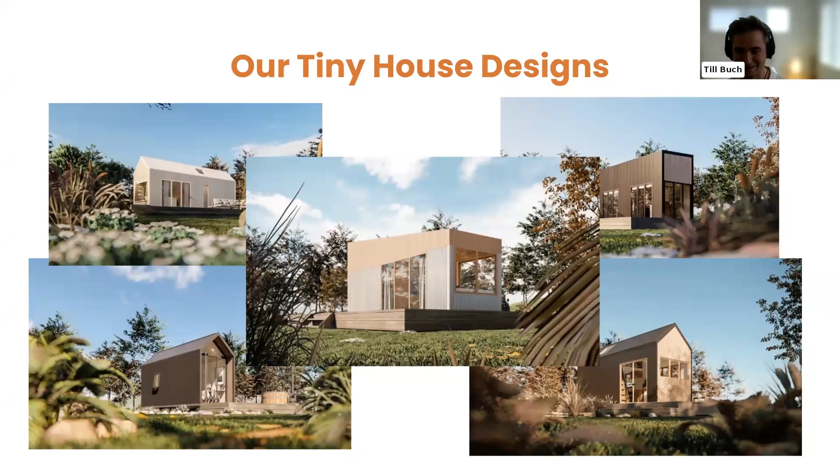A little bit more background about us: we've designed over 100 tiny homes now over the last few years, and these are some of the designs that we've done. You might have seen these around somewhere on the internet, and Pinterest probably as well.

So what will you learn today? To get into it, we've seen that designing your tiny house is simply one of the most important steps on your tiny house journey. If you think about it, you will be living in your tiny house for maybe a year or two, or if you've got a short-term solution in mind, maybe 5-10 years, or maybe you will be living in it for most of your life, if that is your plan.

And if you think about it, a tiny house is a small space and it needs to be perfect for you. We want to make sure that you can design your own tiny house so it is exactly right for your unique lifestyle.

What I will be showing you today is how to go from the inspiration stage - you can already see Pinterest on there, so you probably know what that is like - and take all of your inspiration and go from a concept that you can then refine further, or even share with a builder, DIY by creating plans that you can show to them, or then of course DIY as well.

I will be showing that using our own software. I will be live designing a tiny house in front of you, so you can just follow my own design process. It doesn't take long - that's why I can do it in the 30 minutes that we've got.

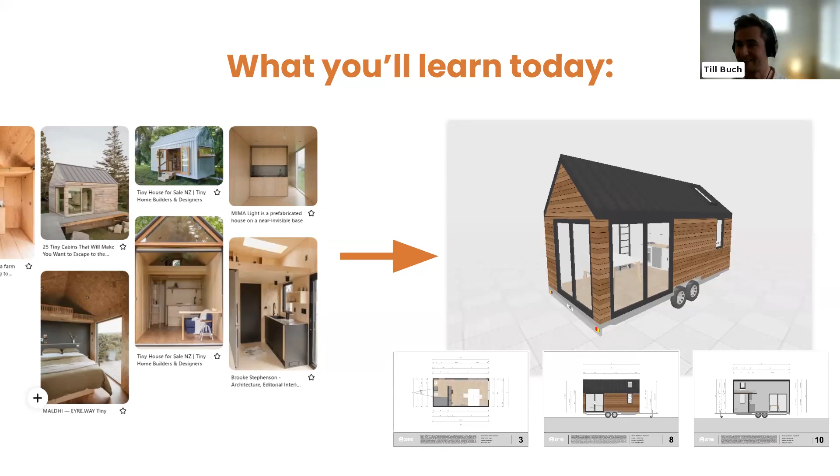And just as a reminder, this talk is for everyone. So if you are just at the start of your tiny house journey and you're just discovering what the tiny house movement is like, great - you're discovering a little bit about designing tiny homes and how that might work for you.

If you are already deep in your design process and you're trying to finalize things, then this is also great for you, because you can understand how you can go to the next stage and actually create plans that you can use to show your builder or build off.

Or if you are a tiny house builder listening in, this will also show you how you can efficiently design a tiny house rather than spending 50-60 hours in SketchUp or AutoCAD hacking away at plans. You can do that in a couple of minutes if you're using the software.

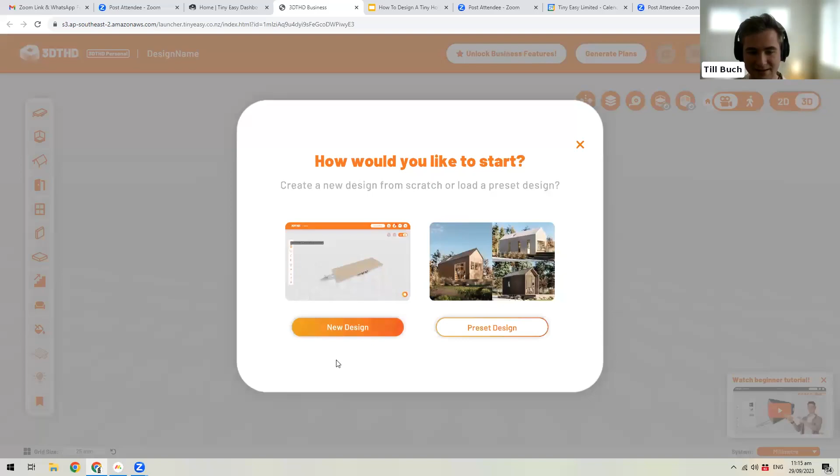All right, so I'm just going to stop this presentation here, and I'm going to jump into the software. So this is the 3D Tiny House Designer, and I'm going to start by creating a new design. So let's call this one here Tiny House Conference. There we go, conference, if I can spell, perfect. And I will use the imperial system to get started, because that's what most of you guys will be familiar with probably. Again, you can choose whatever works for you.

And I'm going to pick a 20-foot long trailer. I will make it 10 feet wide, and it will have a double level so you can fit a loft into it. And I will choose a 4-inch wall thickness. Just as a quick reminder, this is just the start. When you're configuring your tiny house, you can change all of this later. It's just a good starting point so you can put down a basic design. Now I'll choose a gable roof and a 35-degree angle, and there we go. Now we've got our basic tiny house.

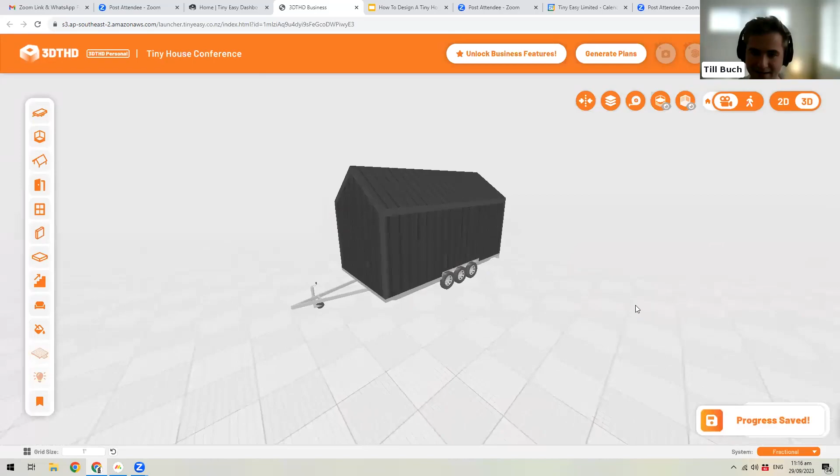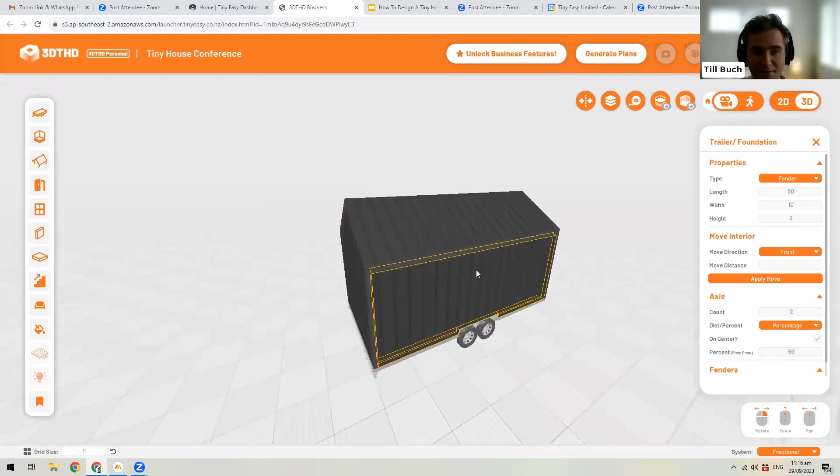So I'll just quickly click this tutorial reminder away because I already know how the software works. And I'm going to go in and change the axle of this down to a 2-axle trailer because it is a small tiny house. We don't need 3 axles for it. And I will maybe move the axle back a little bit so we have some more space and it's fully centered. So now what I will do, I will go in and create the design. So it looks like the zoom bar is just hiding what I've got planned here. So I'm just going to close some things down.

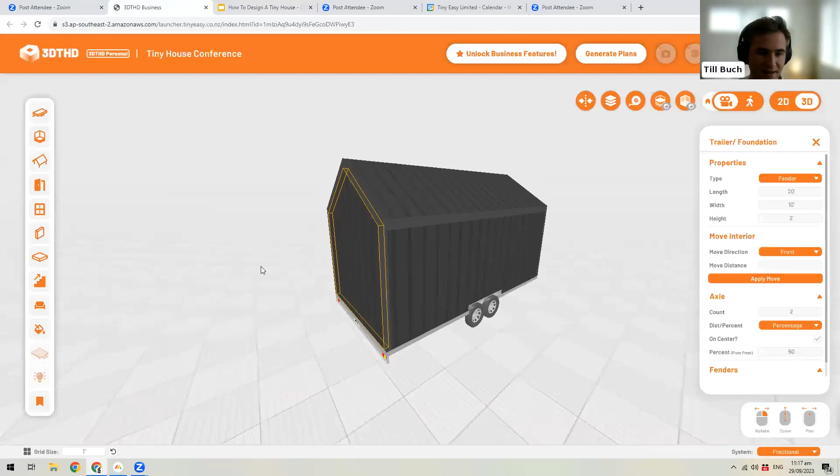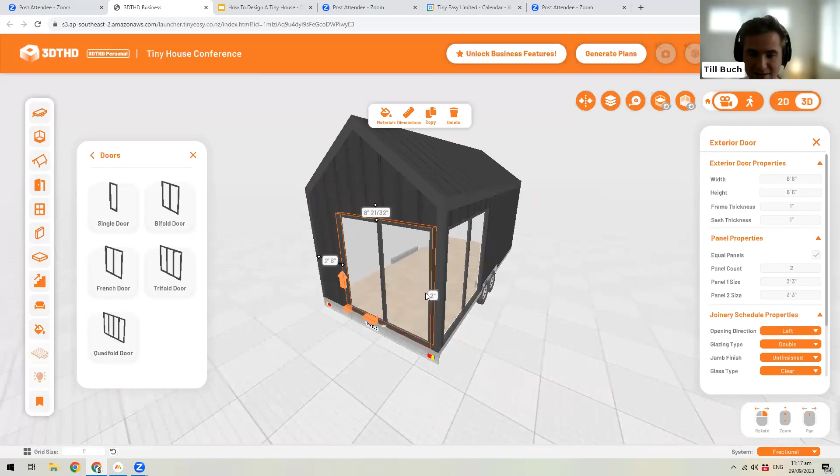There we go. So I will look into my presentation and I will look at my inspiration. So for the exterior, I want to have this kind of minimalistic modern exterior with 2 large windows, which will be for my working area. So I'm just going to go in and grab an exterior door, and I'll grab a bifold door, and I'll just pop the door onto the exterior, and I'll change the door to a 6'6" width, which will just give it a nice square look. And I will just move it 2 feet away from that edge here, and I'll grab this door again. I'll just copy it over, and I'll move it over a bit, and again have that 2-inch gap here over there. Perfect. So now we already have that exterior, and I can go in to start modifying my interior.

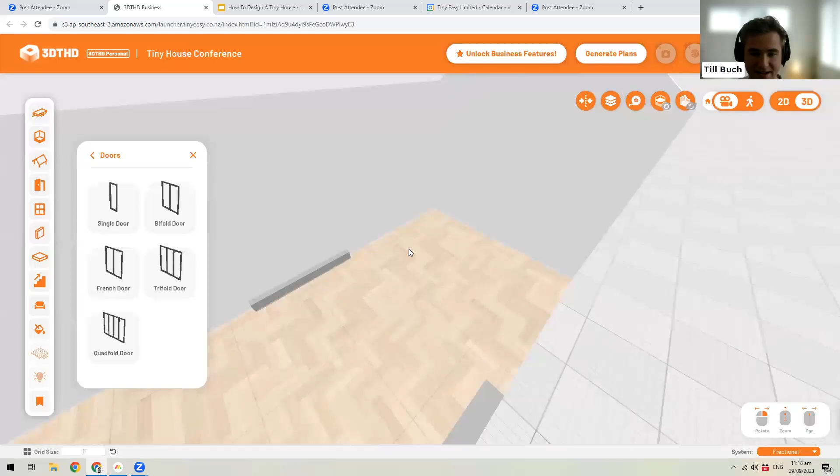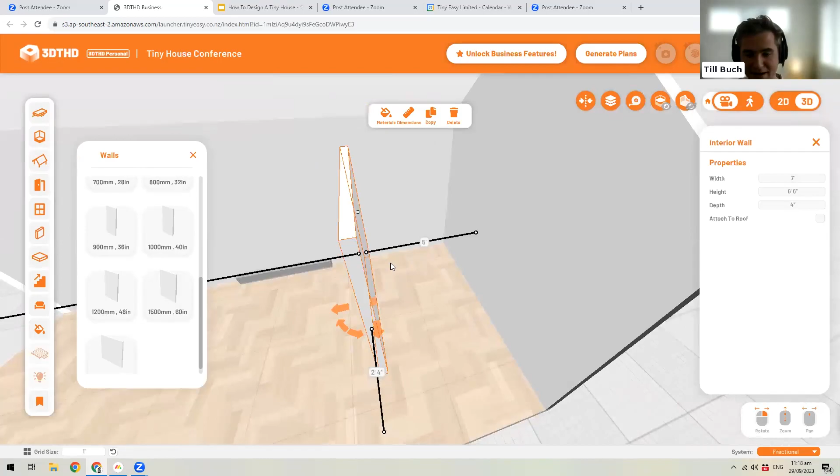So I'll just disable the exterior here for now so I can look inside, and I want to create a small little bathroom like this here. So it's a similar layout like this. So you've got a door and a bathroom behind and a loft on top. So I'm just going to recreate this. So I'll go into my walls and grab a wall like this. It's 60 inches big, but I'll just change it to, let's say, 7 feet for now, and I will have a 5-foot gap here. So we have a pretty purpose-built tiny house, and we don't need that much intricate design here, so we can actually have a bit of a bigger bathroom.

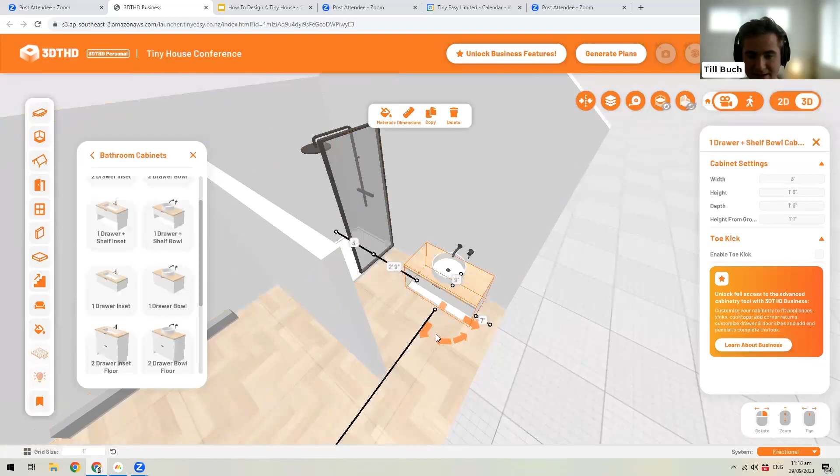So I'm going to go in now and grab a shower. So I'll grab this shower here, and I'll just rotate it and push it into the corner. So it's already 5 feet, so it fits perfectly. And now I will grab a vanity. So I'll just grab this preset here. So it's a floating vanity, and I'll change it over to a 3 feet width like that.

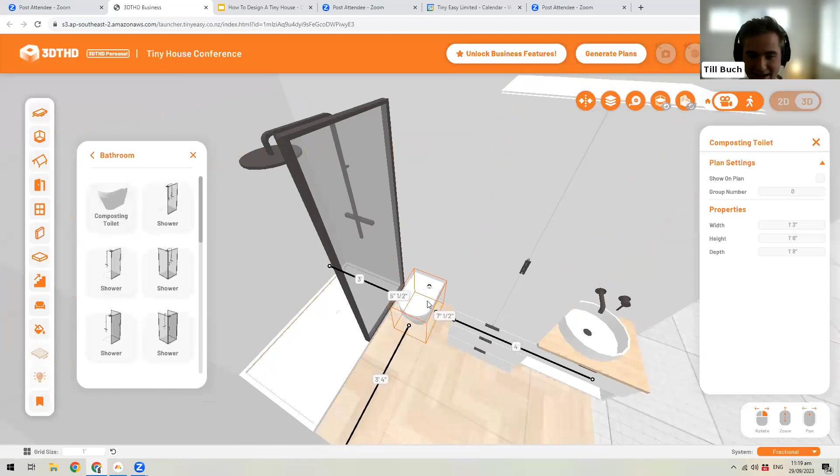And now I will grab a storage unit, probably with some drawers in it as well, so we can have some storage for my towels, and I'll make it 1.5 feet deep like that. Perfect. So now we've got some storage in here as well, and we cannot forget the toilet, because that would be a pretty sad bathroom otherwise. So I'll just grab a composting toilet here, and I'll just push it into the corner. All right, so we've got our bathroom design.

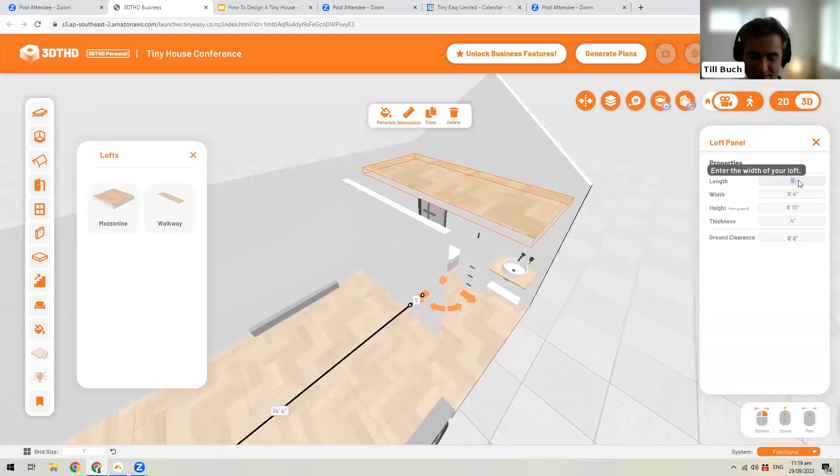I'll just quickly push the height of this cabinet down a little bit because we will put a loft over it as well. Now I'm going to grab a loft panel, and I will resize it to 9 feet and 4 inches because that's what the interior width of the tiny house is. I already knew that beforehand, and I'll make this one square as well so we have a bit of space for my loft.

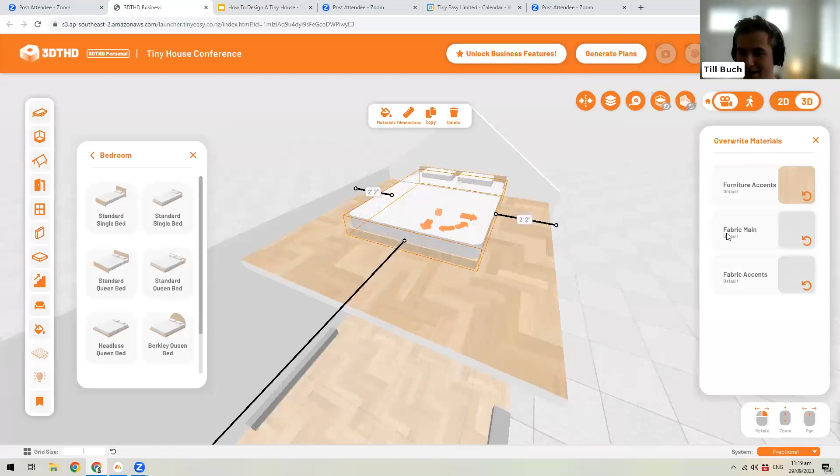And now I will go and grab a bed. So I'll grab a queen size bed. All of these are preset to the standard sizes, so you don't have to go on dimensions.com to understand how big everything is. So it will just speed up your design journey. And in my bedroom, I want to have this dark green kind of style for my bed. So I'll just click on my bed and give it a green sheet here like this, so I can match that style as well. All right, perfect.

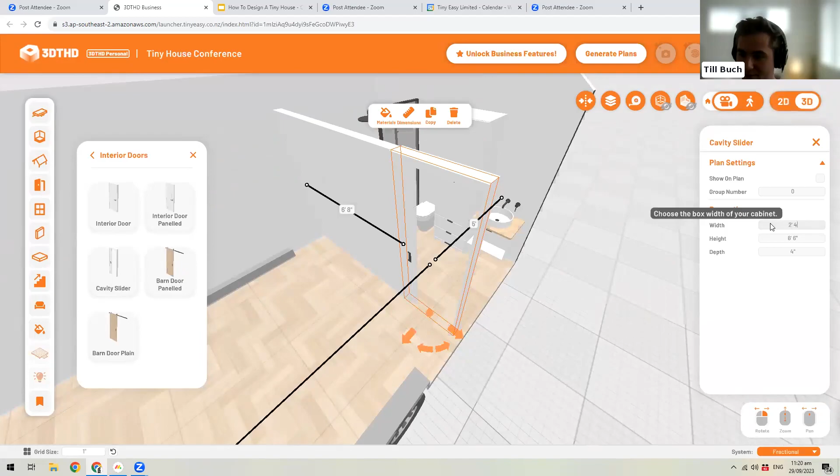And now I will disable this loft here for now. Oops, that's the roof. There we go, the loft. And I will still want to grab an interior door, so a cavity slider or pocket door. That's what we call them in the US as well. So we'll make this 2 feet and 4 inches like that, so it fits perfectly into the gap.

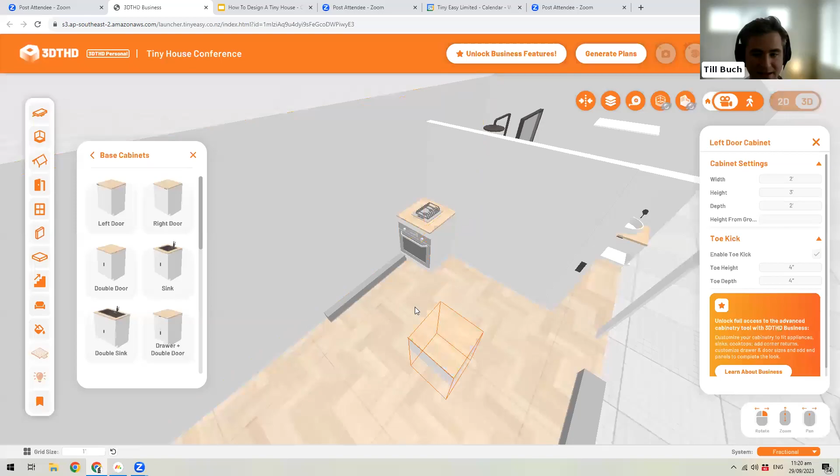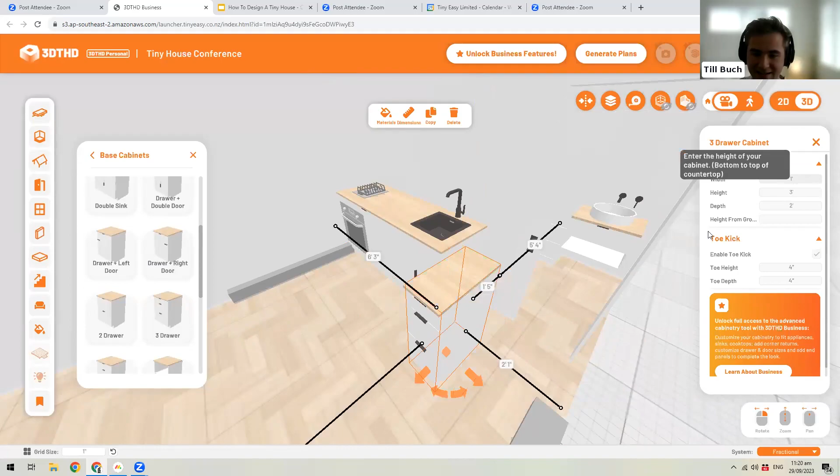And now I will grab some cabinets to start building my kitchen. I will go into my cabinet library, and I will start with an oven and a gas hob like this, and I will just pop it into the corner. And now I'm going to go and grab a left door cabinet. So this might have the space for an integrated fridge in here, like a little bar fridge or something like that. And then I'm going to grab a sink. There we go. And I'll pop it next to the other cabinet as well, and I'll grab a triple drawer like that. And I'm just pressing R on my keyboard, which is just a shortcut to quickly rotate a cabinet or any object, and then I'll just push it in here.

So the last thing that I still need to do is add some overhead cabinets because I want to replicate this design here, or actually these are both very similar. But I will just grab a wall hung cabinet here with a top hung hinge, and I will make this only 2 feet tall, and I will pop it next to the wall like that.

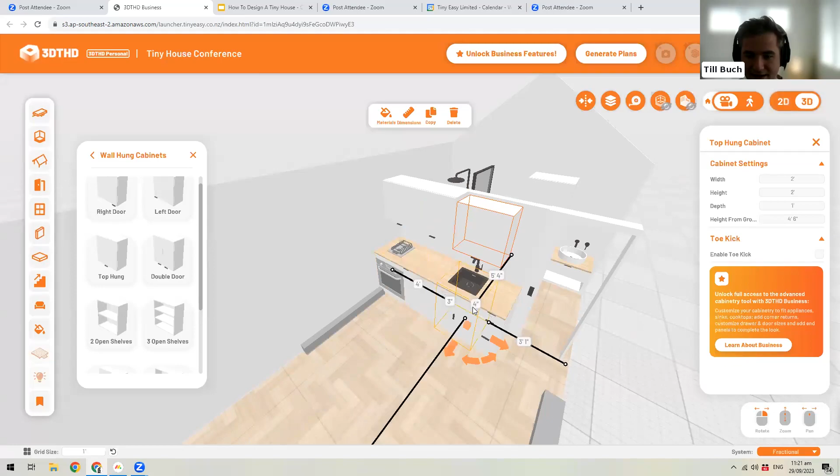And now I'm just going to copy it over and use my dimension tool here to just place it accurately again. Because in the end, if you have a drag and drop system, you also want to be accurate at the same time. So we have those dimension callouts to show you exactly where everything is in 3D space. And now I will pop my cabinets in here as well. All right, so that is my kitchen done. And now I will go and activate my loft again. So now we can see the loft has perfectly fit over that kitchen.

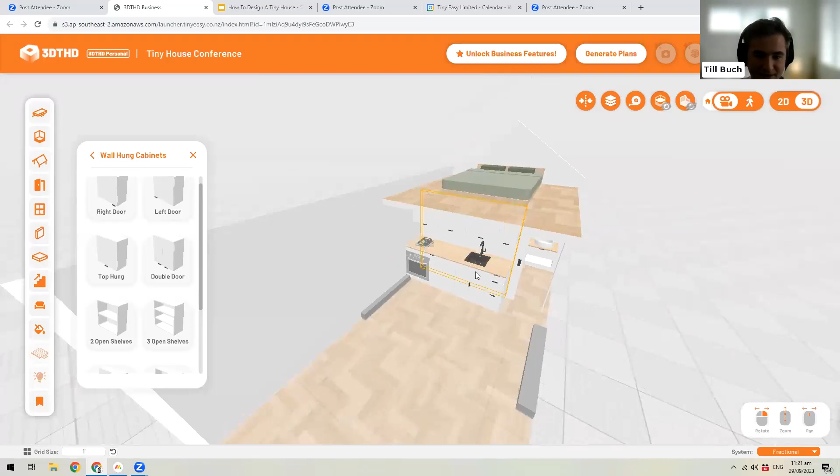So now what am I gonna grab? I want to grab a bench seat that will go this way. So I'll go into my storage and grab a bench seat like this. And you can still put some cushions on top later if you want to, but this is just the actual structural bit. That's the way that you're gonna build it. And there we go. Now we've got a bench seat with lots of storage underneath.

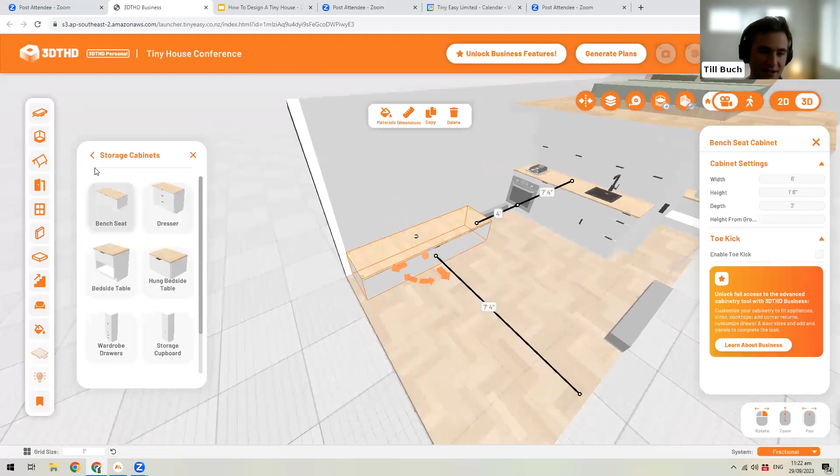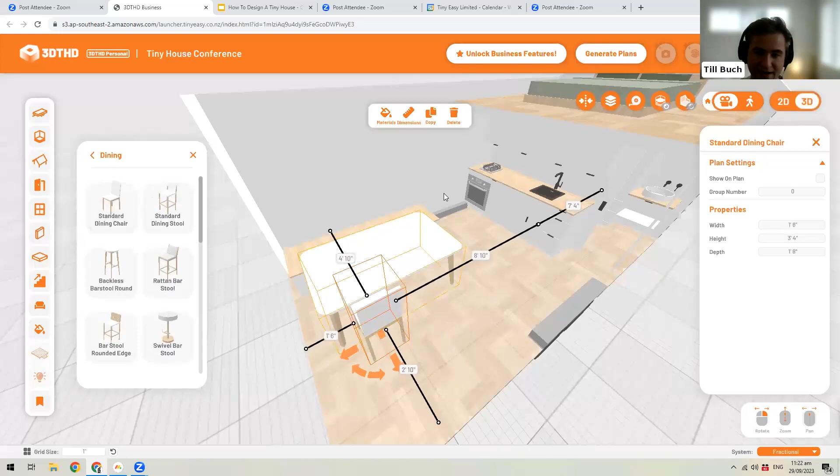And I'm going to go and grab a table that I can work at and also eat at, because that is important. And we'll maybe make this 6 feet long and 3.5 feet deep like that. It's a pretty huge table, but I want to make sure that I have lots of space for everything that I want to use this table for. Now I can add a couple of chairs like that, maybe even one on the other side here. Perfect. All right. And now I still want to add a ladder so I can get to the loft.

So I'll go into my stairs and ladders here, and I'll grab a sliding ladder. And this is one that's on a moving bit, so I can move that around if I want to as well.

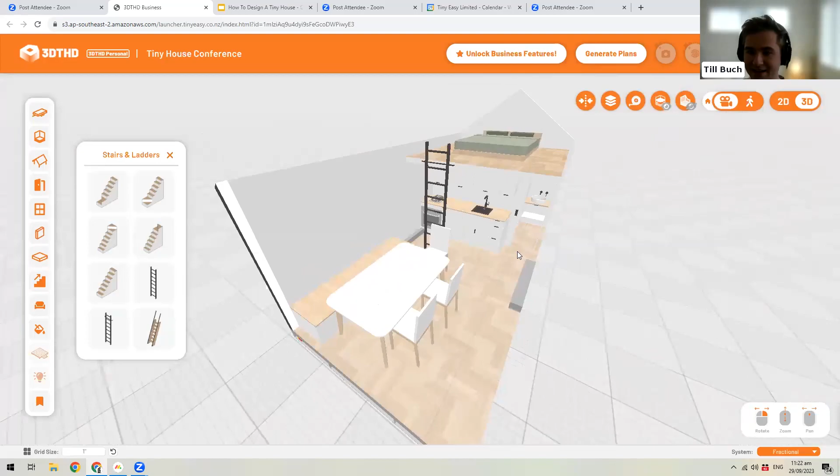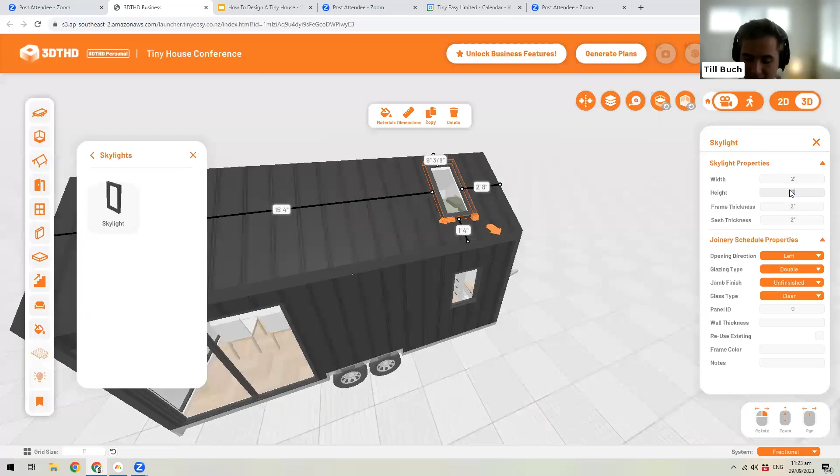All right. So we've designed the basic layout of my tiny house. And now I realize I haven't added a window to the bathroom yet. So I'm going to grab a window here and just push it maybe 2 feet away from the wall like that. And then I'll do the same thing here with a skylight. So I'll grab a skylight, and whoa, it's huge. So I'll maybe make it 2 feet by 3 feet like that. And we'll also push this the same distance away from the wall. And now we have a nice little skylight here.

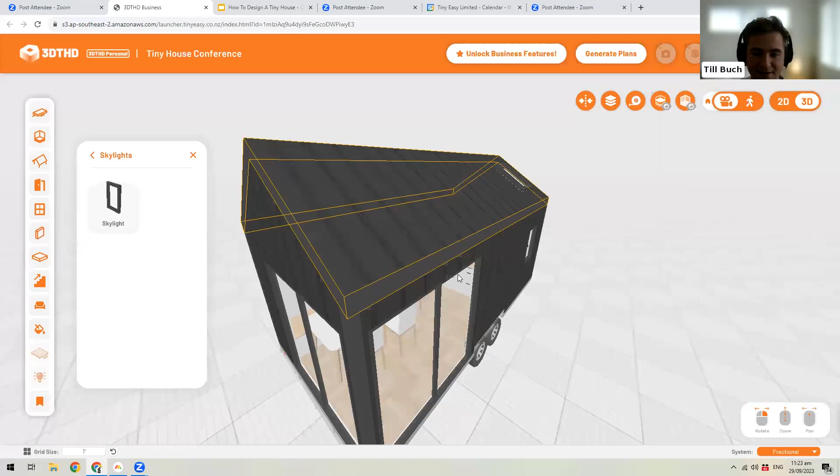And the last thing that I haven't done yet are the materials. So if you look at this style here, you can see it's a very timbery, comfy look. And with exterior as well, we've also got an exterior timber cladding. So I'll just go into my materials here, and I will apply some cladding materials. So let's say we'll grab some timber cladding like this, and we'll also make sure that the flashings are not actually metal flashings, but just a wraparound timber. So we'll make that work like this.

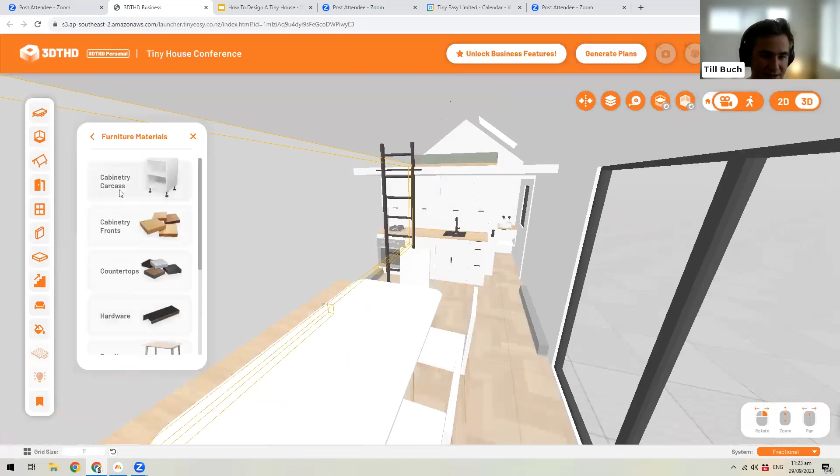And then for the interior, we'll just change all of our interior materials to fit the same. So for example, my cabinetry carcasses all become this color here. And then my interior walls should also become, what do we want to do? Maybe we want to do a ply lining like this. There we go. And we'll do the same thing for the ceiling. So it's a nice and cozy kind of look. But there we go. So that's the design itself.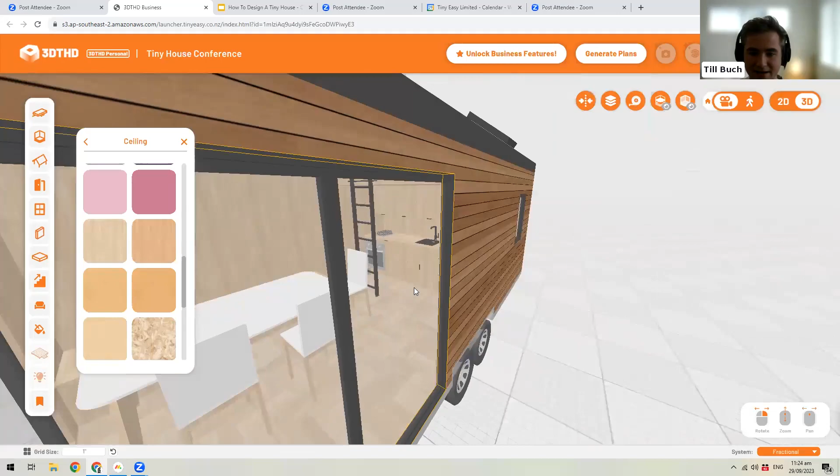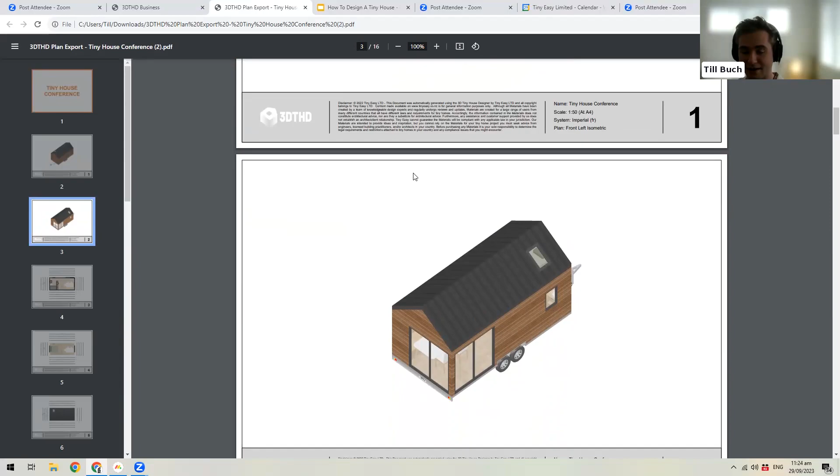And now the important bit comes, which is generating the plans. I'll show you what that looks like. So I'll click the Generate Plans button, and now it generates a full set of PDF tiny house plans for me. And now it's downloaded. There we go. And this is the tiny house that I've just designed. So rather than drafting manually, which you would do in regular programs, that's why you hire a draftsperson, the software does it all for you. So it's fully automatic, and you can now use these plans to communicate with a builder or DIY off, or just shelve these plans for later and keep working on your concept.

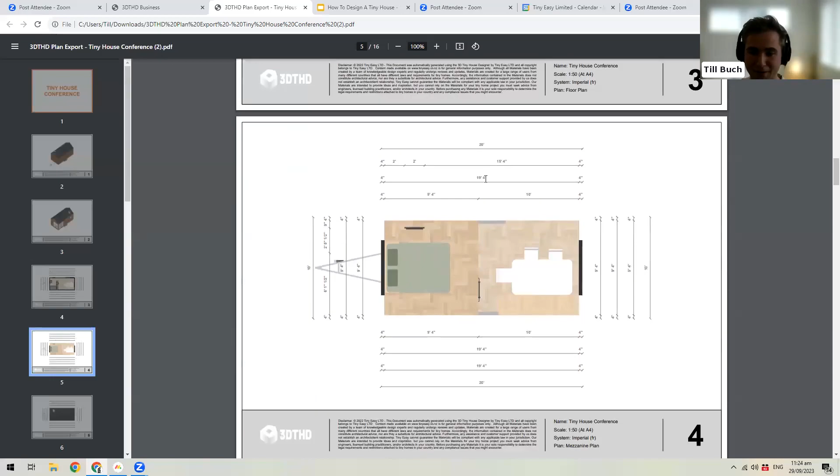And this is the floor plan that it exports. So it shows the sizes of the tiny house, where all of the windows and doors go, where the cabinets are. Then the same thing for the loft here. Then we've got the roof plan showing where the skylight goes. And then we've got all of the elevations showing where the doors and windows go. And then we've got the sections as well. And then we've got the door and window schedule as well.

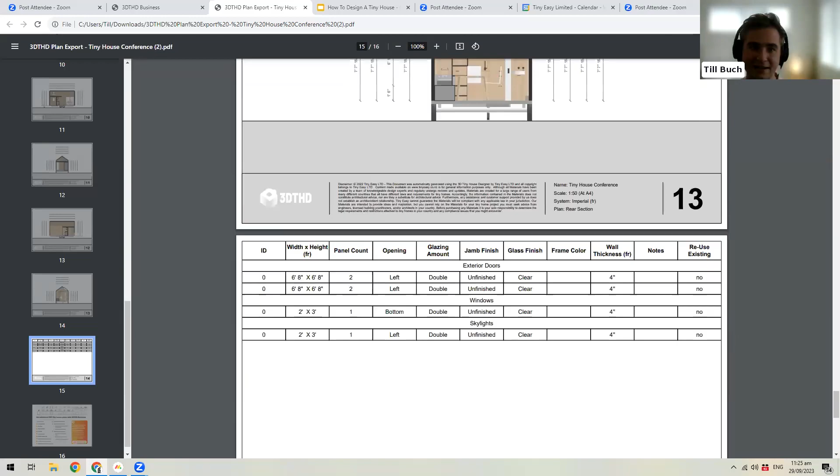But yeah, so that is how the software works. So I'm going to go back to my presentation here. So I'll just quickly close this down and go back in here to my slideshow. So there we go. Let's sum it up then. So where's my slide? There we go. Yeah, so now it's your turn.